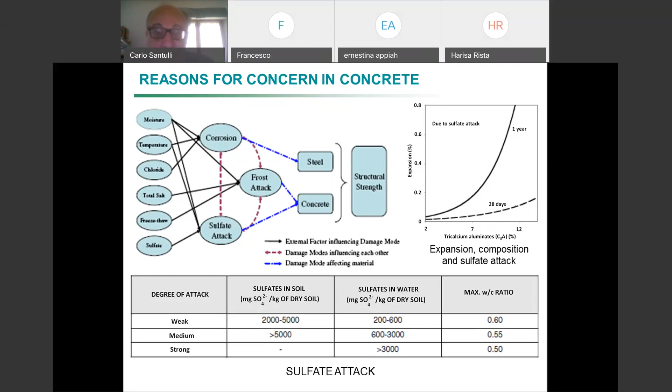The studies on concrete therefore involve a lot the question of voids and cracks. Voids are in a sense necessary in concrete because they allow the material to be set into its mold, and then to be left alone until removal 28 days after. You may remember that the structure of cement is mainly formed by CSH gels, which means calcium silicate hydrate. So they are hydrated and constituted mainly by calcium carbonate and silica. But they are gel. In fact, we discussed a lot about the rheology, how this gel performs and fills the mold when hydrated, and how well it is able to dry over time.

Of course, there might be some crystalline parts. There might be some capillary voids, which allow the water to move around. Then a lot of studies are important about the dimension of air which is able to be trapped into cement and withstand the effect of frost, because there are trapped air bubbles which are less than a millimeter, and we can also have some larger voids, which are always filled with air.

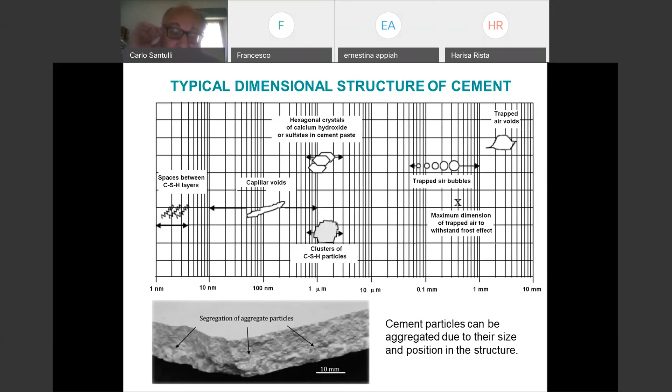And this gives you an idea of the effect of the porosity. Porosity propagates in different ways, and this depends, of course, on hydration, and it has some relation with the water to cement ratio. So it develops with hydration, and it creates these nets of capillary porosities.

You may remember that the ideal water to cement ratio, which allows you to come to a complete hydration, is 0.42. Having said that, we could also work with lower values, and in practice there is another limit, which is the percolation threshold, which is 0.18.

Below that, water is so little that it is not able to diffuse in cement through the pore network, and the formation of capillary networks is necessary in a sense for the characteristic of the material to allow it flowing, etc. So the capillary porosity, for the characteristic of the material itself, needs to allow water to flow.

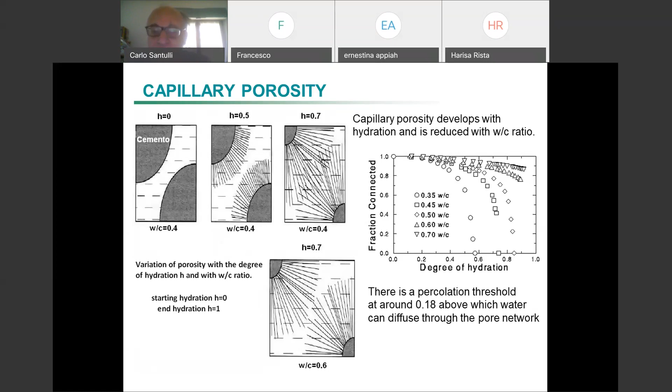So when we talk about aggregates, if aggregates have a dimension of less than 100 microns, we still don't talk about concrete. So concrete is a cement plus aggregate that has a structural significance. In other words, we might have some aggregates and still not have concrete. We might have some small aggregates.

Yes, as to the question that Francesco was posing, if I understand it well, the trapped air voids can be due to inaccurate management of the cement when it is processed in the mixer, because of course the mixer is usually in open air and you have some air coming in. So that's why we need regulation of the mixing velocity and of the mixing time, with the risk that more air comes in.

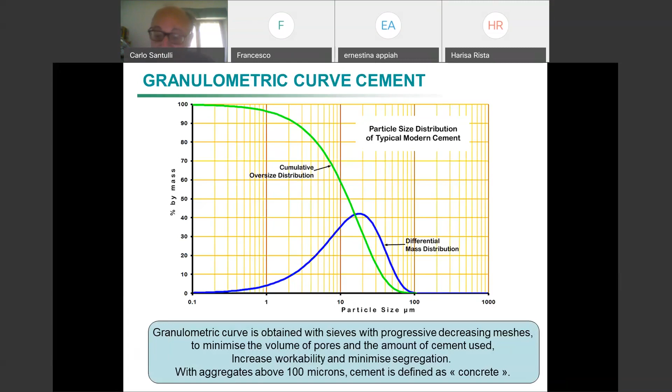there are some curves which are even more scientific in a way, which is the Bolomey curve. As always, you know how material science works. We start from an ideal situation. It's not very different from gas physics. The ideal situation is represented by the Bolomey curve. The Bolomey curves indicate the distribution. Here we are on the other side: we are at aggregates which have an equivalent diameter of more than 100 microns. You can see we get up to 19 millimeters of equivalent diameter. So chunks of stone or gravel, etc.

And we can say that we have a parameter which is A. A is a constant. This is, again, a technological test. So it's a test made on the real material without calculating, for example, physical characteristics like strengths and so on. This is a probabilistic study; what we calculate in reality is just the probability, to understand which is the ideal distribution of aggregates.

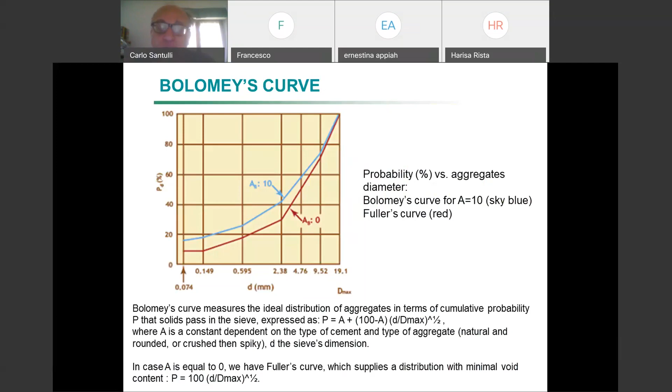Of course, Fuller is a bit ideal, because if we have minimal void content, it's very likely we are not able to work our clinker with aggregates and so on to make concrete. So we have some other technological tests which are interesting, and I show them because they give you an idea of how these things work. These are very simple tests. They are not very precise in physical terms. The comparison might be with hardness tests. Hardness tests are very important because they are cheap and fast. The slump test, again, is cheap.

It is not as fast as hardness, but considering the amount of material which is involved, it is important. As always, the curves are orientative of some studies, but they just give you an idea of how the thing works. Basically, we have this pile, this troncoconic pile of materials which are put together into making concrete.

What we want to see here is whether our concrete would collapse, because one occurrence in concrete is that the wall collapses before the end of the cure period, in some cases even later on, but in most cases during cure, because it's drying and water is coming out, depending on the temperature. Anyway, you have this kind of percolation, and the wall collapses under its own weight.

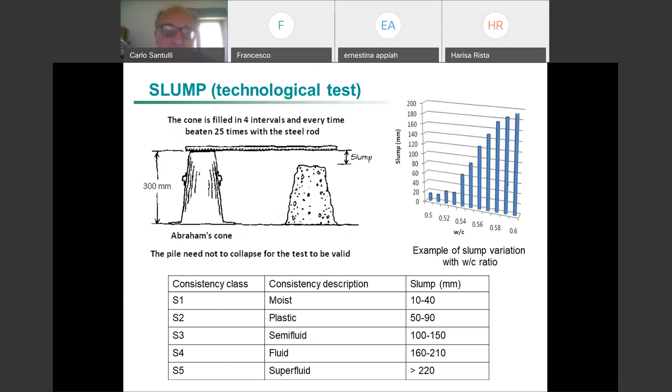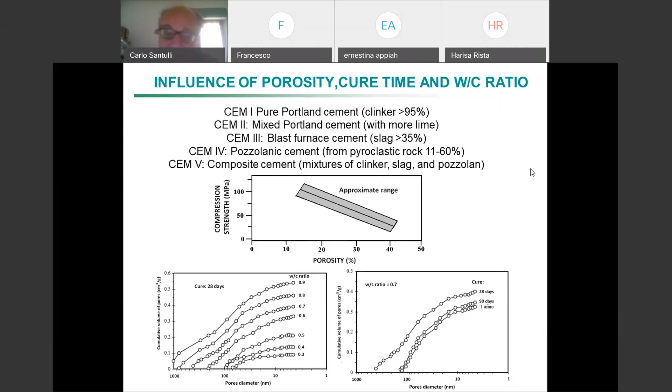Okay, so about steel bars. We are going to make reinforced concrete, and we put some steel bars. You know that we use these bars, which are especially prepared. They are not smooth. They have a number of cavities in order to provide the best possible interface with the cement. The idea is that the cement is able to penetrate into these cavities and provide some interface and basically bond. The bars work in tension, the concrete works in compression, so they provide a useful mix.

In practical terms, we have low carbon bars, ferritic bars, and what happens is that they are oxidized. They are provided with an oxide. We have already done some corrosion some time ago. And just to give you an idea, we have two situations. Here we have an aerated concrete, a concrete where air is able to pass throughout. Again, it's an ideal situation. In a sense, it is the worst situation. The real situation is in between.

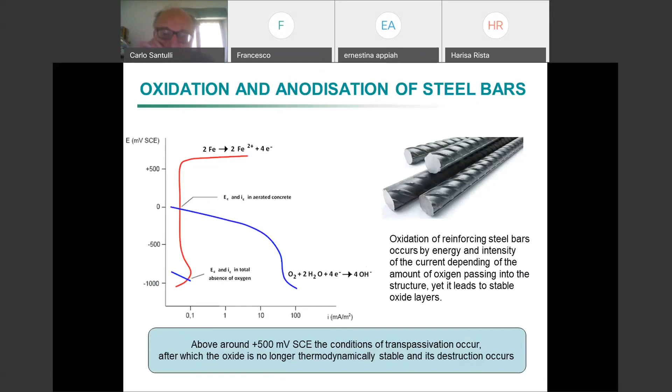This is done for every type of cement, in every type of condition, because this is a condition that assumes that there are no salts, so no chloride, no sulfate, and other salts. In other cases, the area in which the oxide is stable is much more reduced in practical terms. And therefore we need to see that, because there is also another question.

Also, apart from chloride and sulfate, there is also the question of carbonation. Carbonation means what happens normally: you take lime and it becomes limestone. Lime is calcium oxide, and it becomes calcium hydroxide because it is hydrated with water, and then you have the action of carbon dioxide, and you have carbonation, so you have calcium carbonate, which is good.

Having calcium carbonate would be good in all senses if we didn't have steel bars. If we don't have steel bars, then it's good to have calcium carbonate because it's more stable, tougher and stronger than calcium hydroxide. Okay, so it is structural. But if we have steel bars, what I didn't specify about the corrosion curves is that they are, of course, pH dependent, and they work well with these steel bars, which are sort of anodized, so they have sufficient thickness and stability not to be detached from steel

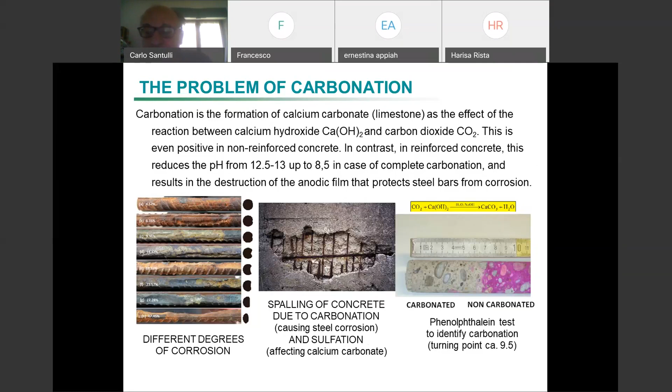Then you have here a possible test to identify carbonation, because of course there are some pH indicators like phenolphthalein, and the non-carbonated area can be seen by the fact that it is colored by phenolphthalein, whose turning point is at 9.5.

Okay, here two examples of steel reinforcing bars. Steel reinforcing bars, you may remember, give you an idea of how things work from an ideal point of view. And in practical terms, we are able to use the steel bars according to their compression, their tension stress in operation. So the tension strength for these two types of bars I'm showing is 540 and 450 megapascal.

And then you can have one which is cold drawn, another which is hot drawn. I remember that cold drawn means that it is drawn at less than 30% of the melting temperature of the iron in Kelvin degrees, and hot drawn it's above 70%.

And this gives you an idea of how these two curves work, and in practical terms, what is expected is that epsilon, the strain, is very low. In practical terms, we don't expect very high strains, and that's why we intend to use this kind of steel, which is also very hard, and it can be drawn quite precisely, because the steel bars need to be very precise, because they will be damaged by the effect of corrosion. So we need to start from an interface between steel and concrete which is as precise as possible.

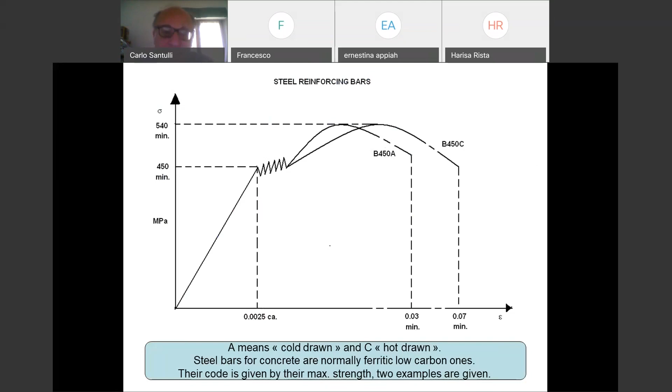This is a consequence, because we can produce concrete with potable water, drinking water. In other cases, we don't produce concrete with drinking water, because we are not obliged to do that. Drinking water costs more, and we use lots of water to produce concrete. So in some cases, it's better to use a non-drinkable water, so-called industrial water, which you can use for some industrial operations but cannot be drunk.

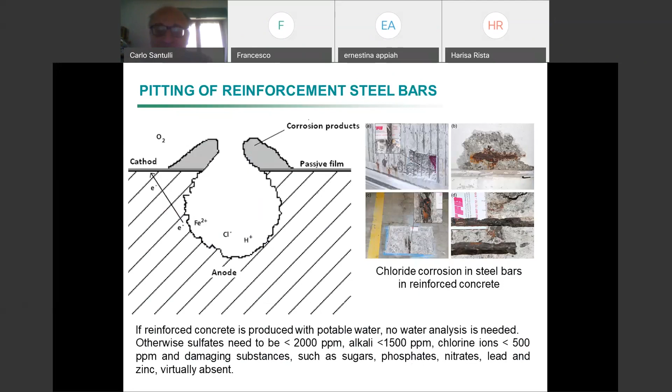For example, sulfates need to be less than 2,000 parts per million, alkali less, etc. And for some substances there are stricter requirements: sugars, phosphates, nitrates, lead, which need to be virtually absent, because they form complexes with calcium carbonate, which might lead to even more complicated situations in terms of affecting the concrete and corroding the steel bars.

I would spend the last few minutes to make you understand how in practice these things work, how we decide which kind of concrete we use. So we have here the characteristics. I have already shown a part of this before.

So we have the water to cement ratio, which appears to be the controlling factor, because as I was saying, it's the only one which is really controlled at the time of the production of the material. Concrete is different from other materials in the sense that with other materials, for example steel, we can control any parameter we want. We can control the temperature, the pressure, even the environment, because we decide we are going to perform that in a definite environment outside the control.

This is even more so for polymers. In polymers, we control anything because the melting temperatures are lower, and therefore we need to be very careful about, for example, the entrance of trapped air, etc., because air bubbles in polymers might be devastating. And porosity. So concrete is completely different in this sense.

We have the water cement ratio that controls strength and durability, so how it's going to last over time. Strength is the initial strength, of course. Workability and cost. There are also some technological measurements of workability. If you are curious, you can look around. There are a number of technological ways, apart from measurements of viscosity and of the rheological behavior; you can do some technological tests like the ones in this lab to see if the material is sufficiently

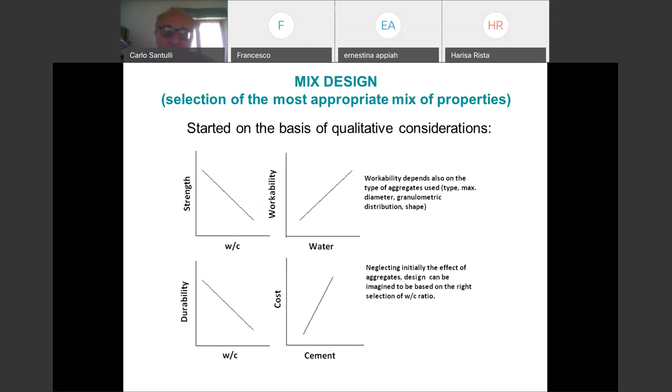In more practical terms, the properties are the material type, the class of compression strength, because depending on the type of structure and on the geometry of your structure, you want to have different compression strengths. Environmental exposure, which is becoming very important. The fact that you are in an area where water freezes at night, so you are likely to have temperatures below zero. You can have salt water.

You may need to avoid, for example, the penetration of water. You are not in a saltwater environment, but for example, you are making a dam, so it's not salty water, but you need to avoid that water penetrates. And other conditions, for example, you want additional protection of the reinforcement, because you are required, for example, to use a limited thickness of your concrete above your steel bars or steel net. If you are obliged to use a limited thickness, then you have to add the protection of the reinforcement,

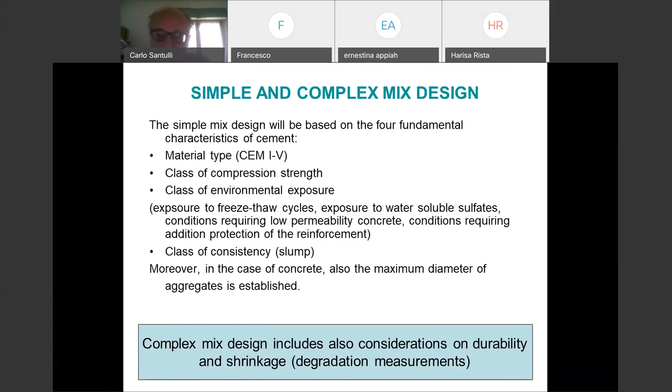So we can have, in this case, closed and open conditions. Closed condition means that there is just one condition. For example, I want to use this type of cement, and I will adapt the other characteristics. I only use this type of cement because I have seen it works in this environment, or because I can use it. Simply speaking, I have to adapt all the rest to my cement.

Or you can have an open solution where we can have all possible combinations, a number of combinations. And usually the one which is always kept constant is the class of exposition, because in the closed solution there are some situations that may produce a very nice concrete, but it cannot be used at sea, for example.

In the other case, if I have an open solution in which I can accept different types of combination of factors, I need to keep constant the class of exposition, because an open solution is done to apply in a definite place. So in a definite place, I have my cement. So a closed solution is more for routine building. So I have this cement, I know I can do a number of different works.

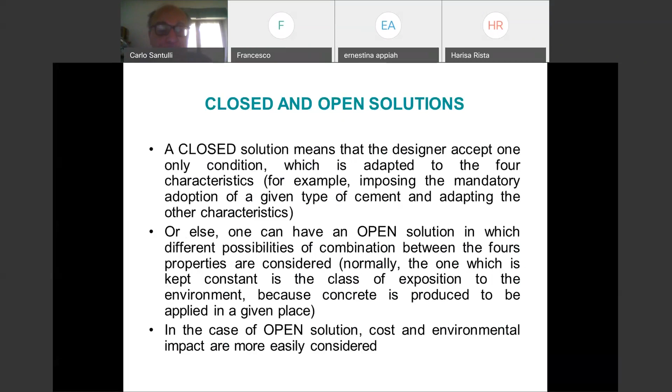So durability is becoming more and more important, and so I need to adapt the water to cement ratio to the combination between durability and strength. If I have a high strength cement, the water to cement ratio for durability is higher than the one for strength, so I adapt to the one for strength. If the water to cement ratio for durability is lower than the one for strength, I adapt to the former. So I have a low strength cement.

In this case, it is resolvable because I take two indications, durability and strength, and I adapt to the lower water to cement ratio, provided it is workable. It needs to be sufficiently high for cement to be workable, and then I adapt to the one that puts me less into trouble, because basically if I have a low strength cement, I have to increase the strength of cement, and therefore I have to reduce the water to cement ratio. I always try to reduce the water to cement ratio, provided that workability is ensured.

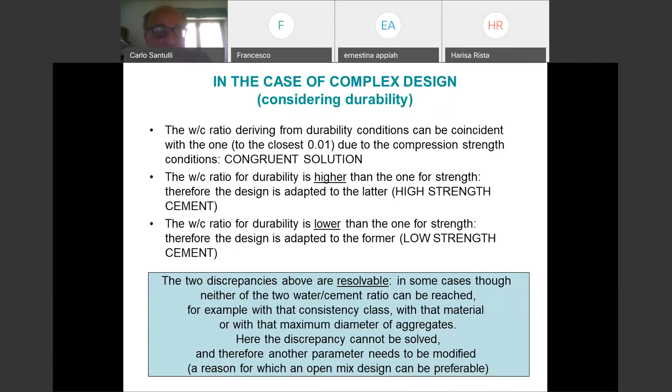so it's not that expensive in the end. Then I have keratin waste, in practical terms, human hair. I know it appears a bit odd, but we have a lot of human hair which ends up from hairdressers and so on into landfill. So why not use them in cement? They are stiff in tension after all. And other materials which are stiff in tension are